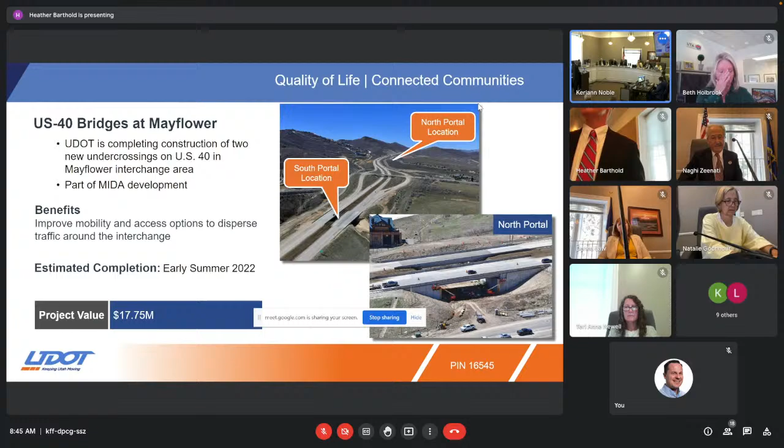Where we currently are as far as status goes, we're wrapping up all the support walls and getting that concrete coated underneath the actual bridges. The bridges have been in place since last fall, so we'll wrap up that work later in June, as well as place the final polymer overlay, that final driving surface on top of the bridges. It helps seal the bridge from water but also provides friction, giving enough grip as you're crossing over so you've got good traction. We still have that to put down in June, so we should be wrapping this up towards the end of June.

The next project just got underway this year. We're doing a couple of different things with it. The first thing is we're rebuilding or replacing the bridge decks over the Provo River, and that's what you can see here on this map.

We've got the uphill, or westbound direction, closed off. The bridge deck has been removed and we're starting to rebuild that. That work will take us into the July timeframe, and with the concrete scheduling, we're looking at switching traffic onto the new bridge around the 1st of August.

Our goal is to keep at least two lanes uphill open in that area at all times, and only one lane open in the eastbound, or downhill, direction as you come into Heber. In addition, we're building, replacing, or repairing some of the concrete panels that have settled or shown additional signs of wear and tear. We're also replacing various segments along the corridor, from the bridge decks up to about the county line.

To keep traffic moving as best as possible, we're taking additional lanes over a 10-day period, removing some of the damaged concrete and replacing it, then taking a break. The goal is to minimize closures over the weekends, because this is the last day for a lot of school districts and we're going to see a lot more traffic coming into the area during the summertime. We're trying to minimize that as much as possible but still get the work done. That work is scheduled to be completed later this fall.

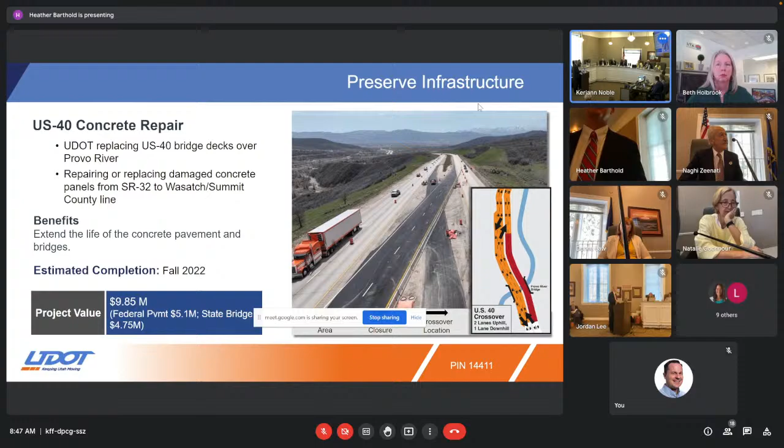In addition, like we've mentioned before, we operate under the philosophy that good roads cost less, so we're always applying treatments at key points during the pavement life to make sure the pavement is in good condition and lasts as long as we can possibly make it.

We've got a couple of chip seal locations that are going to start in the June, July timeframe. There are two locations: one is up Daniels Canyon from Clegg Canyon up to the summit, by the lodge. The other is from Soldier Creek, just east of Strawberry Reservoir, all the way out to Duchesne, where we'll be resurfacing or placing that chip seal.

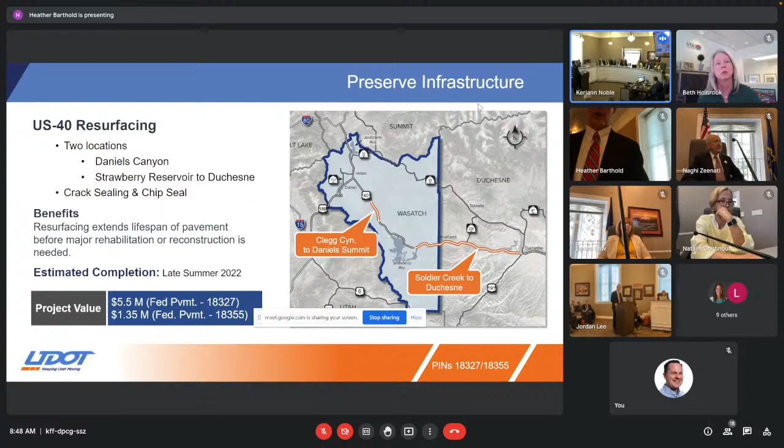There's going to be some additional traffic delays in order to do that work. You have to slow things down. We've got to put pilot cars in place to keep speeds down as well as get the roadway resurfaced, and that work will be wrapped up later this summer.

If you drove up US 189 in Provo Canyon, you'll notice we've had several areas where we're upgrading the center beam, or median barrier, removing the guardrail. This is a phased project, so we've done some of this work in other locations and we're continuing as funding allows to make these improvements.

It's not just a barrier replacement, we're also installing additional drainage systems in the median of the roadway to help that roadway perform even better and to convey the water in a more controlled environment.

If you look at this map, in that red section, the blue and the purple, we're actually working in all three of those locations right now. The contractor had one of their crews become more available, so we wanted to get on top of that and get the work done as quickly as we can. That work is scheduled to be complete in fall of this year.

Yeah, those rumble strips again? What, the sinusoidal?

One of the things we're placing are sinusoidal rumble strips. Right now when you drive over rumble strips, it rattles your car - you hear it, you feel it. You'll still have that, but instead of a jarring movement, it's more like a sine wave, so it's more gradual. In the vehicle you'll still feel it and hear it, but if you live nearby, you won't hear it. It really changes that volume we're used to hearing when a car runs over those.

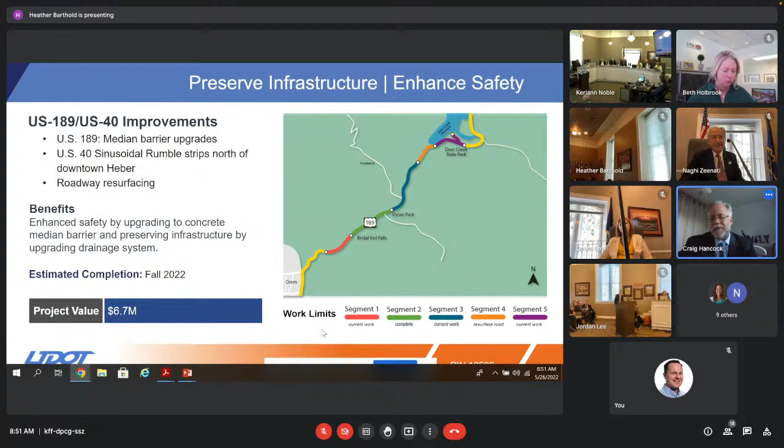Thank you, it's good to be with you. I'm glad I'm able to participate with the technology we have. I'm the project manager assigned to the Wasatch County area - a relatively new assignment for me. Echoing what's been said earlier, this has been a beautiful place to work, and I've had the opportunity to meet many of the folks who live in the area, and they're wonderful people as well. So for the next few minutes, I'd like to go over a few of the projects I'm working on right now, which are in various stages of project development.

I hope you're seeing the slides right now. I saw him a second ago on my screen, but I'm not seeing the slides right now. Go ahead. Okay, thank you.

The first project I'd like to talk about is the Heber Valley Parkway EIS currently going on. As many of you know, the bypass has been part of Heber and Wasatch County planning for many years. A few years back, local leaders came to UDOT and asked UDOT to lead an environmental study, and we've been engaged in that for the last couple years. During that time, we've done a thorough technical analysis of traffic and safety to help us establish the need for the project.

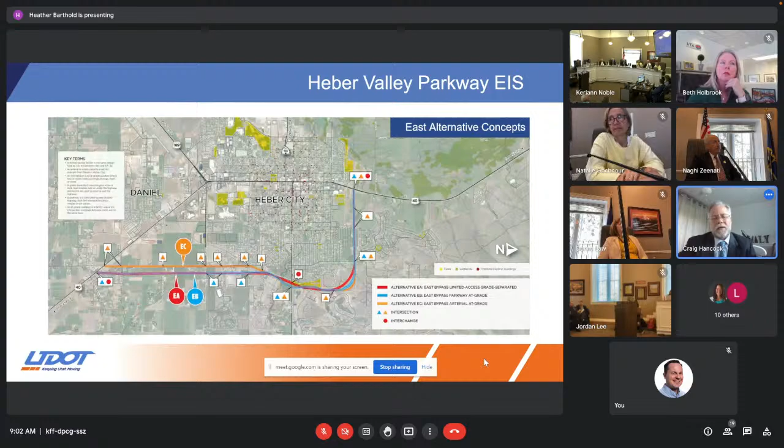The next group of alternatives is what we call our east alternative concepts. We have three concepts here, generally following along or close to 1200 East or Mill Road on the east side of Heber City. On the south end, they connect to US 40 about a mile or so south of the 189 junction, and on the north end they tie in up near 800 North. A portion of this follows along an alignment that Heber City calls their eastern bypass.

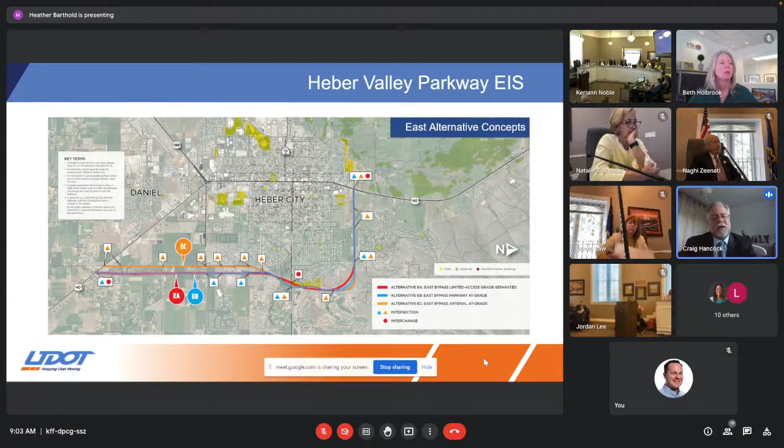So these are the main alternatives that we're looking at. If you wouldn't mind going to the next slide.

There's one more final alternative that we're required to look at, NEPA requires us to, and that's the transit alternative. Wasatch County prepared a transit study back in 2020 with several recommendations to implement transit in the Wasatch County area, and we've used those recommendations to develop a transit alternative as well.

We can go to the next slide, please.

So as I mentioned, we're currently in the process of screening through these many alternatives. The goal of screening is to evaluate these alternatives to see if they're feasible and reasonable to do. Those that are not really feasible will be eliminated. We also look to evaluate these alternatives to see if they meet the purposes of the project, and if some don't fully meet the purposes, we screen those out as well.

The other screening criteria we're using looks at impacts to significant and regulatory resources, namely wetlands, historic properties, and parks. Alternatives that have high impacts to those areas, we also eliminate. So the goal of our screening process is to reduce the number of alternatives we've been evaluating down to just a handful.

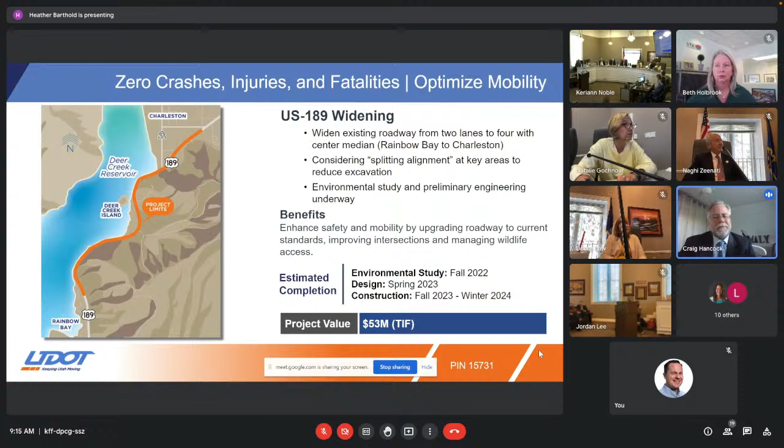Next slide. The final project I'd like to talk about is a study we're currently involved with, our US 189 corridor study. This study goes from the mouth of Provo Canyon all the way up through the SR 113 junction on 189. As growth continues to happen and traffic continues to increase through the Provo Canyon area, we're getting a lot of pressure with access and adding more access and pressure on the various intersections along there. This is a scenic byway area, and we want to be able to preserve the nature of the scenic byway.

The goal of this study is to look at developing a vision for this area going forward, and develop a plan to help manage access and identify projects where we can make improvements through this corridor. As part of this study, we are holding a community outreach component, meeting with many of the land use owners along the area to get a better understanding of their plans. We're doing a traffic and safety study, and then we'll be looking for opportunities for improved access and improvements along the corridor. This is a fairly quick study, and we plan to have that completed later this fall.

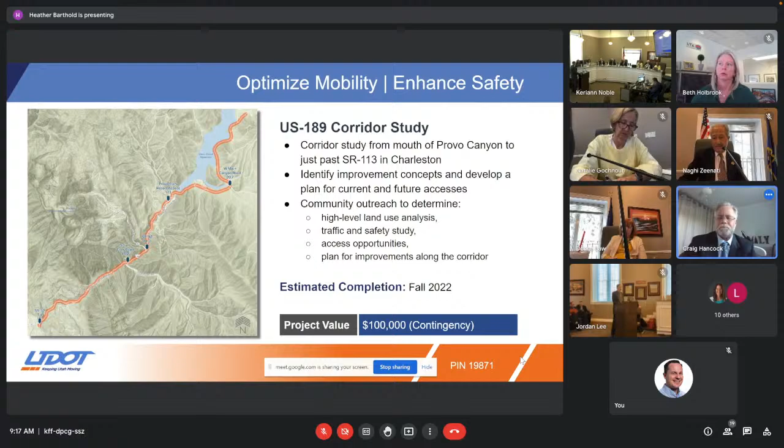We have a bit of an issue with an adjacent property owner, and so we're trying to work through that. He's given us some information and we're trying to figure out how to proceed forward with it. But we are still planning to advertise it later this fall, November-ish, and we're moving forward with it.

Just remember, Matt, we don't have issues, we have opportunities. Yes, there's plenty of opportunities here. Thank you. Any questions on this? Okay.

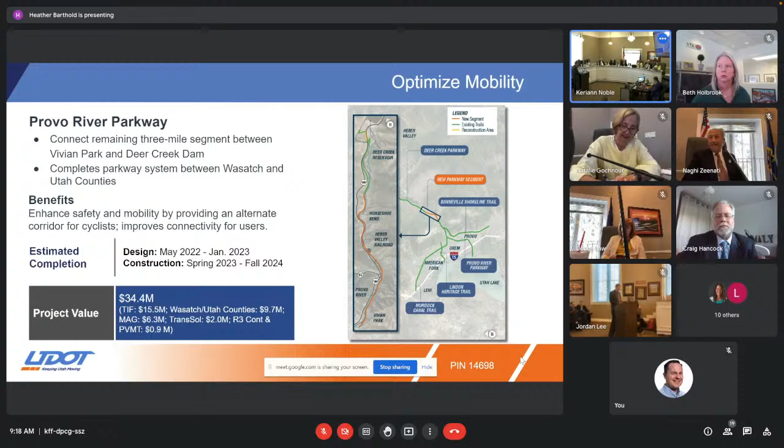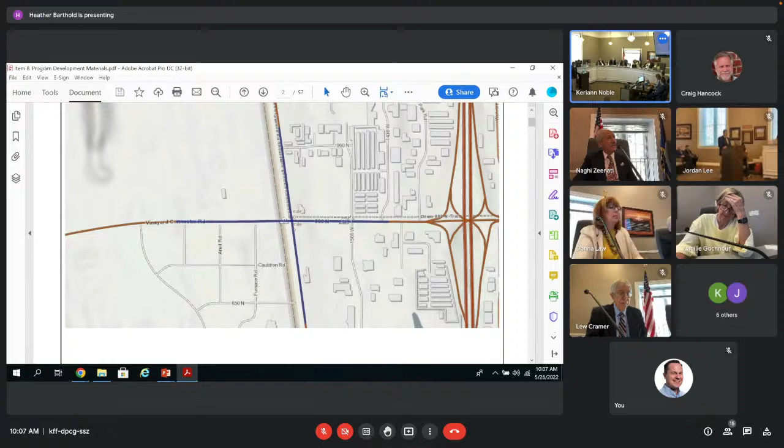Located here on our map is I-15 on the right side. Our request today is a motion to add funding to the SR 52 and SR 114 intersection improvement project as detailed. Ready for a motion? I'll move to approve that item. Thank you, motion and a second on item number A1.

Any other questions or comments? They continue to, you've got the FrontRunner thing on one side, a new gas station on this side, it just continues to grow in that area. So anything we can do to keep the traffic flowing through that bottleneck is really important.

Thank you. Any other questions, comments? All in favor of number one, say aye. Aye. Any opposed? Item 8A-1 is approved.

Thank you. Item 8A-2, also located in Region 3, the Saratoga Springs Pony Express Parkway, Redwood Road and Saratoga Road is a funding addition, a request for $600,000.

Majority of this $3.8 million currently funded is local funding. Our request is to add transportation solutions to this project. Currently, Redwood Road only has a single left turn lane onto westbound Pony Express Parkway. This can cause significant backing up due to multiple schools being located on Pony Express Parkway.

The Pony Express Parkway from Redwood Road to Saratoga Road is a local government project. This addition will construct the fourth leg of the intersection of Redwood Road and Pony Express. The requested UDOT funds would add dual left turn lanes on Redwood Road to shorten the queue lengths and wait times at the signal.

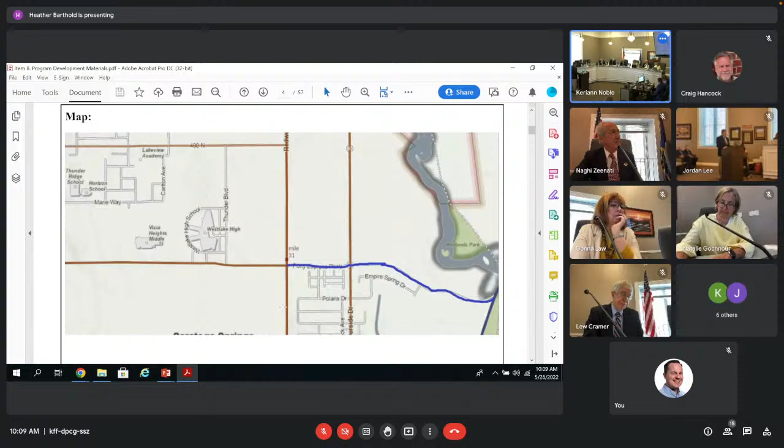Located here on our map, Redwood Road here in the center of the Pony Express Parkway. The image.

Our request today is a motion to add funding to the Saratoga Springs Pony Express Parkway, Redwood Road to Saratoga Road project as detailed. I move for approval of that.

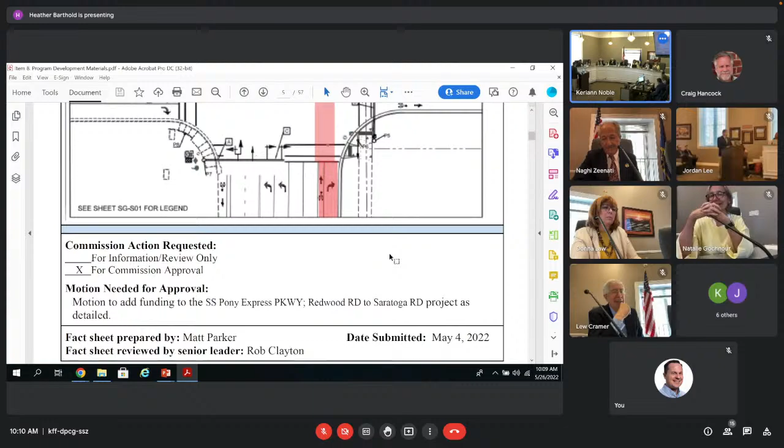Once again, like I said last time, you all have been out there, and it just continues to grow and grow. The high school, the junior high, elementary school, all at the same time there. This certainly will help get the traffic moving through that intersection a little better. I'd like to second that. I spent 3 light cycles getting through there 2 weeks ago.

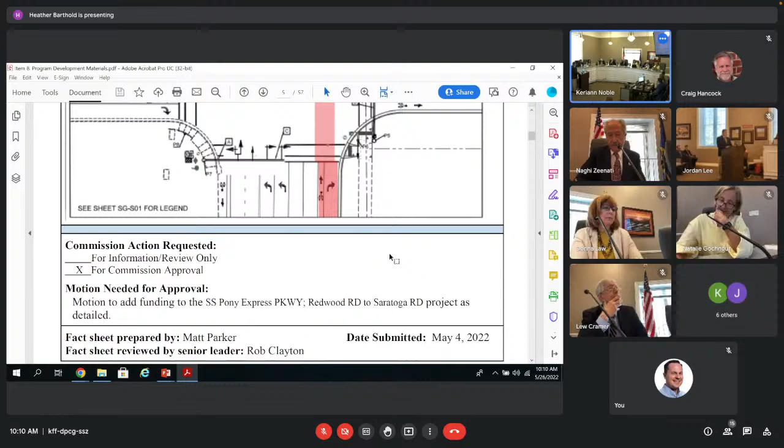We have a motion and a second. Any other questions, comments, concerns? Seeing none, all in favor say aye. Aye. Any opposed? Item number 8A-2 is approved.

8A-3, also located in Region 3 in Roosevelt, the State Street 800 South to 300 South is a funding addition for local funds. The scope of the project is to widen shoulders and add sidewalks to accommodate pedestrians and bicycle access. In addition, it will address drainage and rehabilitate the roadway surface. The project was advertised and bids came in over the estimated project value.

The bids were reviewed and it was determined that cost increases on labor and materials caused the overage. Roosevelt City has provided a letter stating their desire to proceed with awarding the contract and a commitment to provide the additional funds needed to complete the project.

Shown here on our map in Roosevelt. We're all looking to you. Included is the letter from Roosevelt City, from the city manager.

Our request today is a motion to add funding to the State Street 800 South to 300 South Roosevelt project as detailed. Mr. Chairman, I move we approve. Thank you.

Motion and a second, and we love local communities with their contribution. Thank you, being our partners. Any other questions or concerns on this project? Seeing none, all in favor say aye. Aye. Any opposed? Item number 8A-3 is approved.